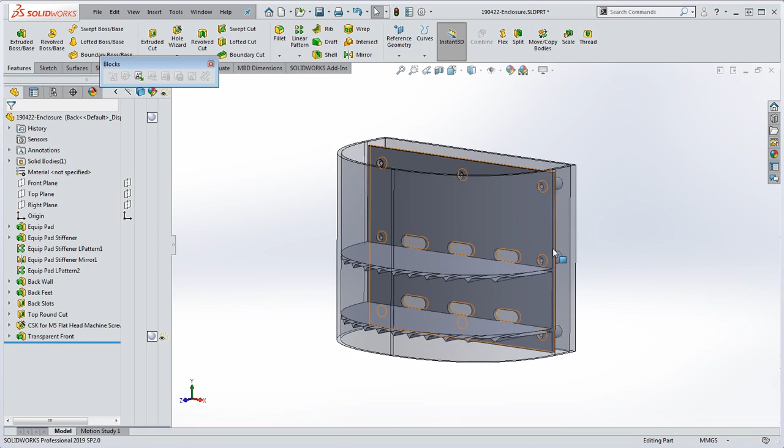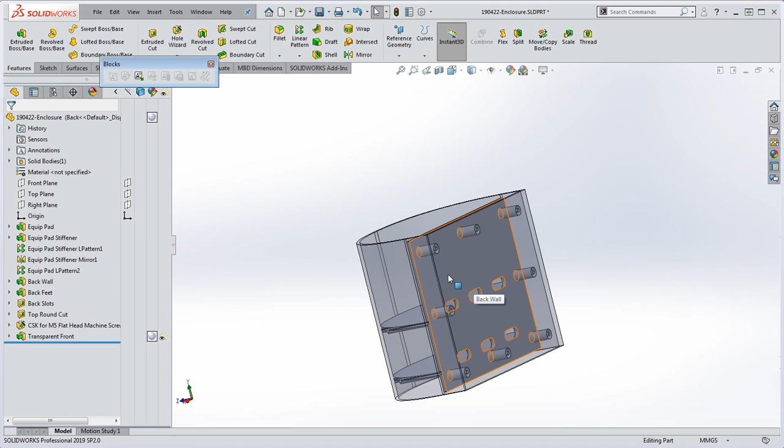So this is our enclosure, and what I've done is I've put in 2 shelves for our equipment. I put slots in the back so that communication and power wires and cables can go through that. I also put some little risers back here in order to be able to connect out to the back of the enclosure too. So we have elements in the back here that allow us to mount extra communication devices, extra electronic devices, but the front is going to be strictly available for our equipment that we're going to use.

So we have the LiDAR on top, and then we have the cameras in the bottom. The cameras are set at a 60-degree angle, so if they're 90-degree angle cameras, like wide-angle cameras, there's going to be a little bit of an overlap. I think your software probably should be able to help mitigate that.

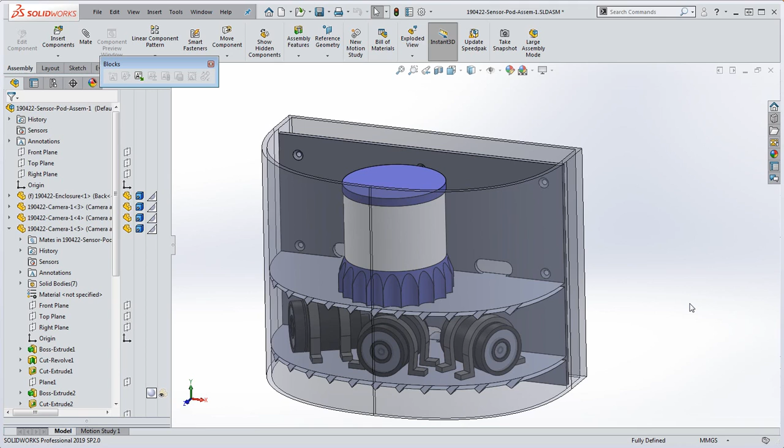But the desire here is to put the cameras in the bottom of the enclosure so they can actually look down. They're going to be looking down mostly. That's what you're going to be looking at. You're going to be looking at the water surface rather than anything horizontal or above that. So I thought that'd be a good place for that. And then the LiDAR could be right on top.

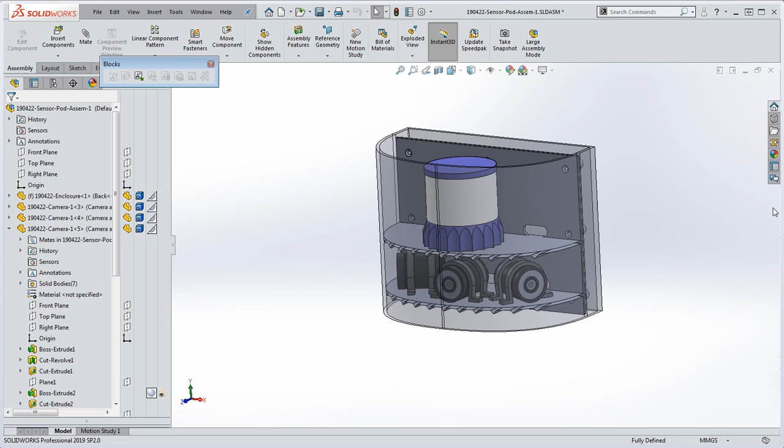So you'll have to give me some advice here. I mean, this is kind of like a first step, kind of throwing that out there, trying to get some advice from you, what you would like to see next. It's by no means going to be what it's going to look like when it's all done, but it's a place to start.

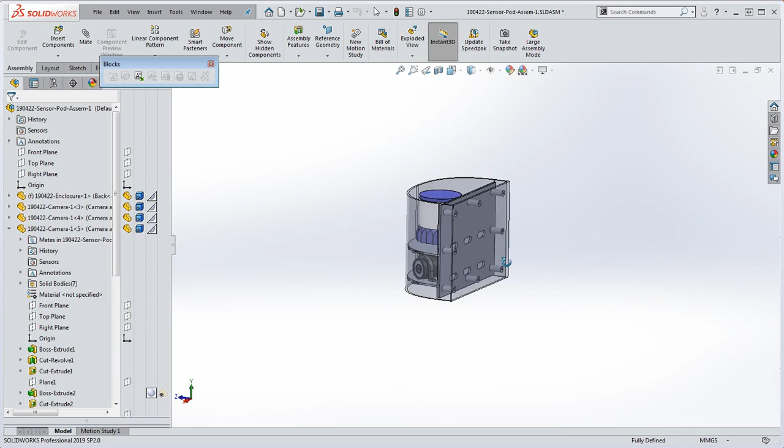And as I mentioned, we have the slots in here for communication and power cables to come through. We're going to have conduits that are going to come out the bottom, and that's typical with an enclosure like this, especially in a harsh environment. You want to make sure that everything comes out of the bottom, and then we can snake it back up to wherever we need to go to after that. So there you have it.

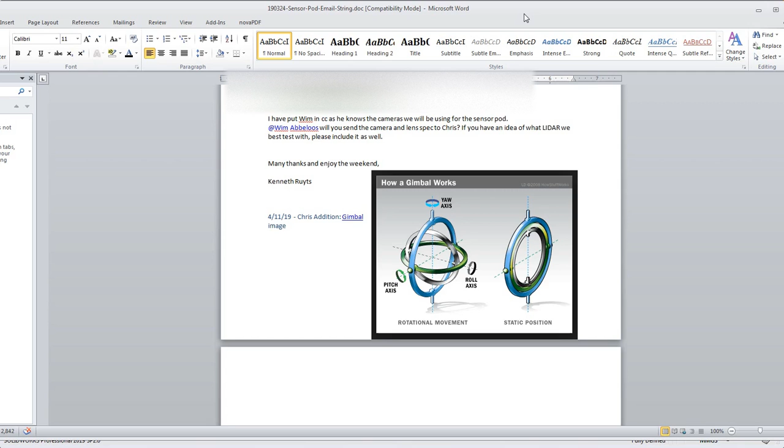Now we have the LiDAR on top, which is the LiDAR unit that you had recommended to me. One thing I don't have in here is the gimbal. I haven't put the gimbals in yet, but we'll get that figured out as we make additional iterations of the model. And then the LiDAR unit is going to be the Ouster OS2, I think, is what it was. So I went ahead and modeled that.

When it came to the camera, I went ahead and borrowed a camera design from GrabCAD. Had to make some modifications to it for our own needs. I put in these bands in here, these clips, in order to give us the capacity to mount that in here. If you really want those cameras to look down, we could actually tilt these in such a manner that they will look down. But right now they're just static and on the surface.

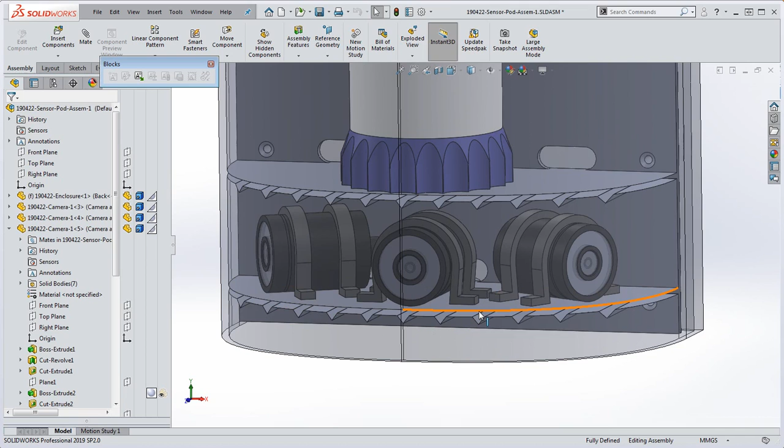When it comes to the shelves, you can see the shelves. It's because of the transparency here. It's kind of showing it as 2 different surfaces. But I have some ribs in those shelves too to provide that extra support. And that way we can make the shelves a little bit smaller.

But this is all speculation. It's all like the first iteration of the model. Put this together in a few hours. And it's just there to give you some feedback. And I'm also going to include a 3D rendering of this so you could actually show this to your investors tomorrow at your investor meeting.

So that's about it. Give me some feedback, and we will go from there. Let me know if you need anything else out of this model, and I'll send that to you.